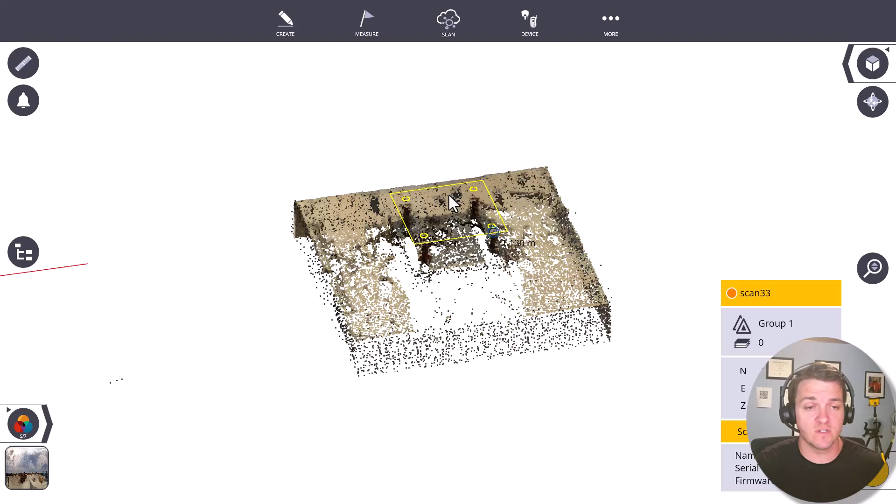It's kind of a two for one. It's going to be a brief overview of how to train models to automatically extract and classify point cloud regions that you're interested in, not just the ones we have on there, so you can own those models and figure out what you want. In this example, we're going to show you how to train a model and have it used to extract out anchor bolts.

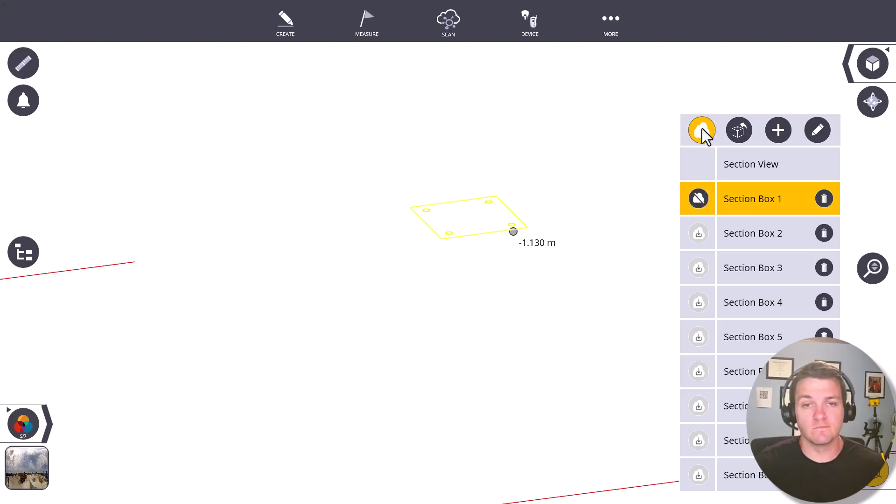We're also going to show you how to push that data to the Trimble Reality Cloud Platform Service, since it just came out. So what this looks like, in FieldLink, what you'd be using in the field, you could easily resection the scanner like what was done here and have that placed, even if you only have 2D models on top of where it should live.

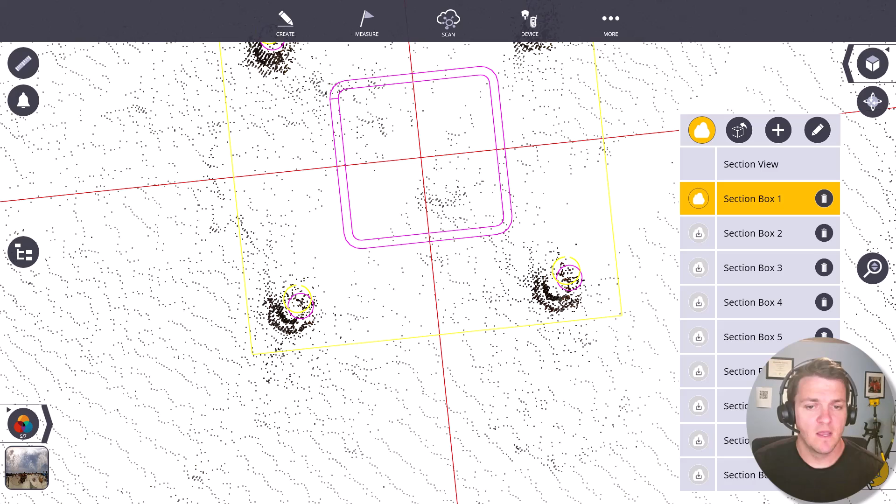So here we can start to see these anchor bolts are roughly in the right spot. I'll turn on the full density so we can see that, and we can confirm they are. I can start to create points on these anchor bolts, which currently, without the Reality Cloud Platform Service, can't be viewed on Connect. But if I can send that cloud, I'd rather do that. So here we can see those full points.

I can export this directly as an E57 non-structured LAS, or if I have a 3D model, actually run a scan-to-model inspection and export that to Connect. I would simply export it. Let's say I already did that. We're going to change this to AB and then drag and drop that into Connect and let it tile.

Now, if I wanted to do this automatically, I could do this in TBC and train my own model. I'm going to link to the training of custom deep learning models and advanced point cloud filtering webinar, so you can hear from the experts on how to do this and get more detail on what is happening.

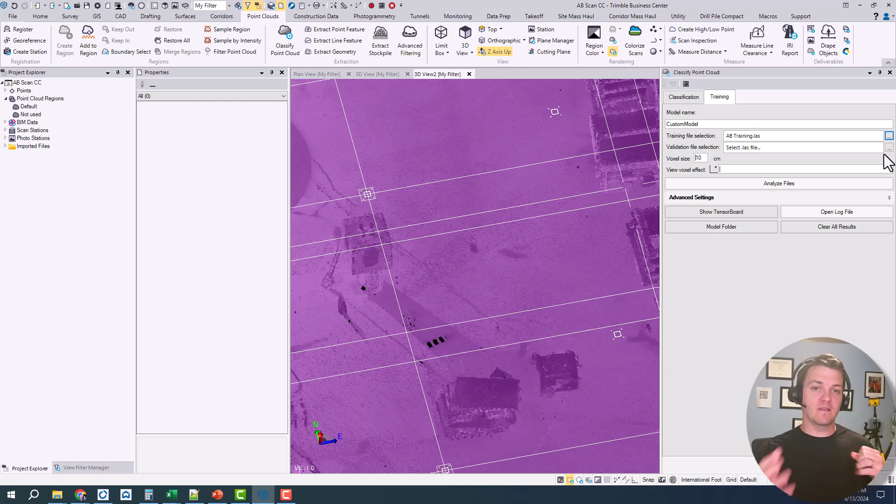To classify a point cloud region automatically, I would go to the training module. I've done this previously, but you need to manually do this the first time so you can give it a training file set and validation, essentially taking most of the region. It's important to have the entire point cloud, but within that have classified regions, so you have what you don't want to see and what you do want to see classified all within the same LAS. Same thing for the validation.

You'd want to do this on a couple different data sets and you can retrain it. Then you'd select your voxel size, which is essentially the size it's going to look at. For small anchor bolts, I'd do like 1, but they'll cover more of that in the webinar too and what those mean. Then you're going to run it through a training data set.

This will take quite a bit of time to actually train it because it's deep learning. It's going to try and figure out, based on the scan data and what you've submitted, how it can match that later for you. Once we've done that, it'll show you the score of what it's coming back through in that TensorBoard.

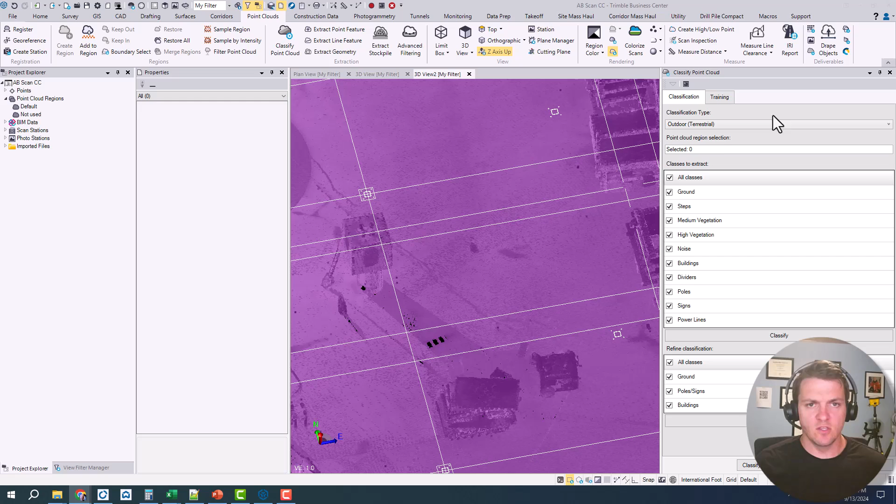We're not going to run that right now since it does take a little bit of time, but once it's done, we'll show you a bit of what that TensorBoard looks like. You can come in and select the custom model that you want to run. You probably want to name that a little better than I did.

And then classify the data that you want. So here I'm selecting the not used, and then I'll classify the anchor bolts. That's going to use that model to automatically extract out just the anchor bolts.

Within that webinar, they show you some customer examples. If you do a good job of segmenting and submitting enough data for it to compare to, they were seeing success rates of 98, 99%.

You're going to see the model I used to train it, and it's actually the same model I'm using here without really going through and doing too much. It didn't score as well, but it's still pretty successful. So we'll let that take its time to chug through, and then we'll show you what the results look like after it's done.

If we jump over to the new Connect Reality Cloud, you can see this is what I've done earlier. You can push it from Connect, or you can drag and drop those E57s and then tile it and view it. That data is going to come up because we've georeferenced it. Everything's essentially in the right spot, and I can start to turn those on. So here is that E57 data.

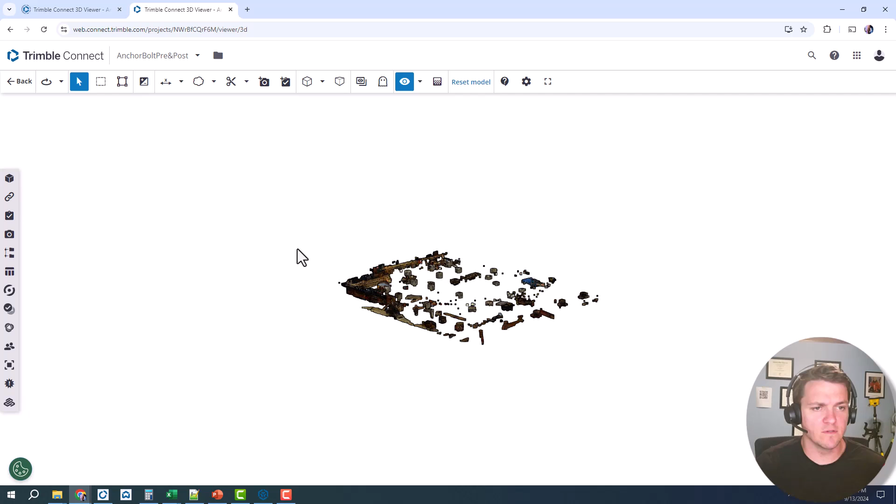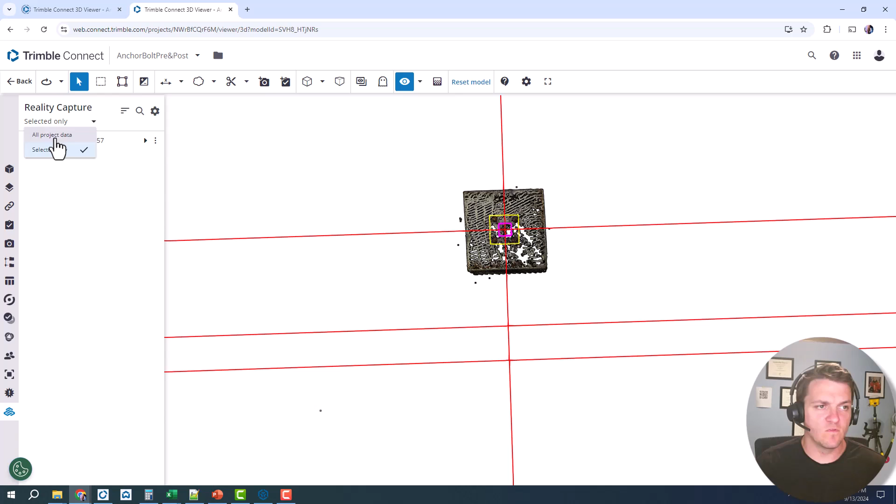What I like to do is also always keep that anchor bolt or the model data that's there. Here we can see the E57. I pushed from FieldLink, moved it over, dropped it in Connect, and you can see it there. The anchor bolts actually look a little bit like this. You can see I have quite a bit of noise because I didn't train a great model, but it does extract out pretty well what that looks like.

So as it's chugging through here, we'll come back and show you that result when it's done. But I'm able to quickly train that model to segment what I want. Quickly is a relative term. But once I do have that done, it's able to classify it and then send it over pretty quickly to Connect,

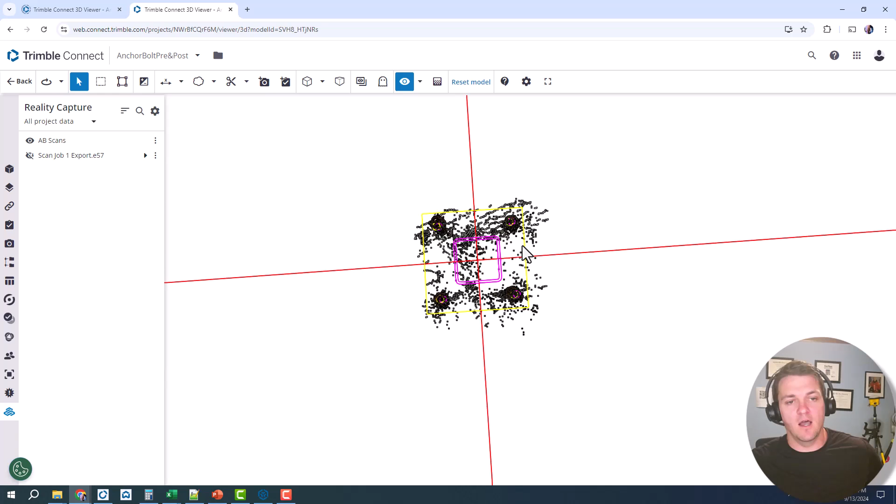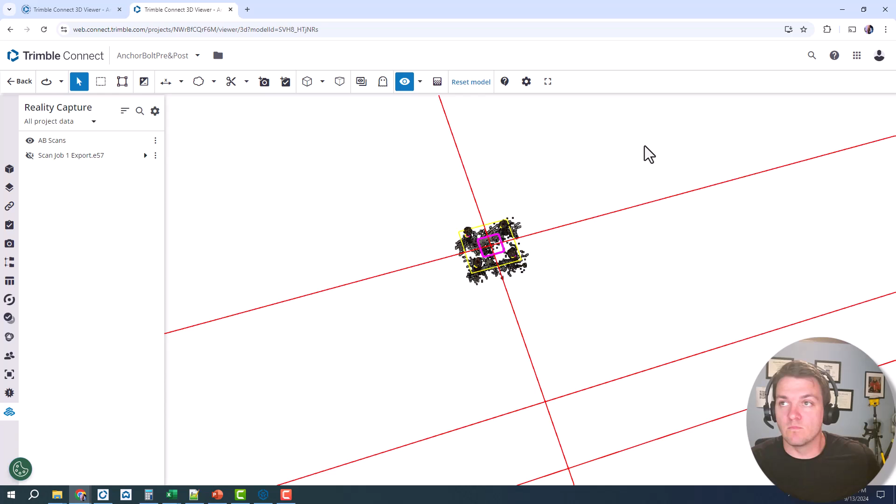And if you can quickly slice this out, users don't need to learn how to turn on and off different classification layers or use clip planes. So it is a pretty nice workflow. We'll jump over and see where we're at, about 42% of the way done.

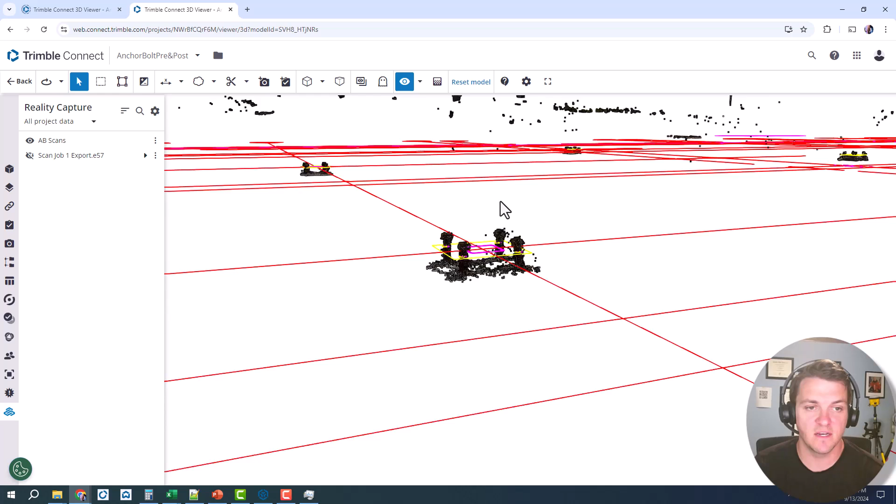And I think really valuable is just sending that data here to Connect so that you can share it with other stakeholders, and they don't even need a license. They can come in and actually see where that's at. So we'll wait for that deliverable to be done and then we'll end this one.

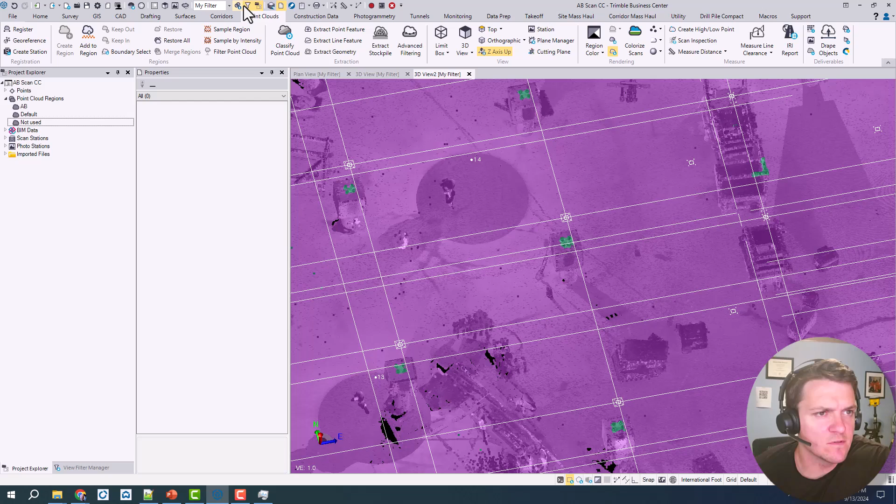If we come in here and I switch over, and sorry, I'm not the most advanced TBC user, we can see what was extracted, and I'm pretty happy actually with those results. But you can see it obviously still needs some cleanup, and some spray that could be better fixed with more training on a model with more data, and continuing to improve that.

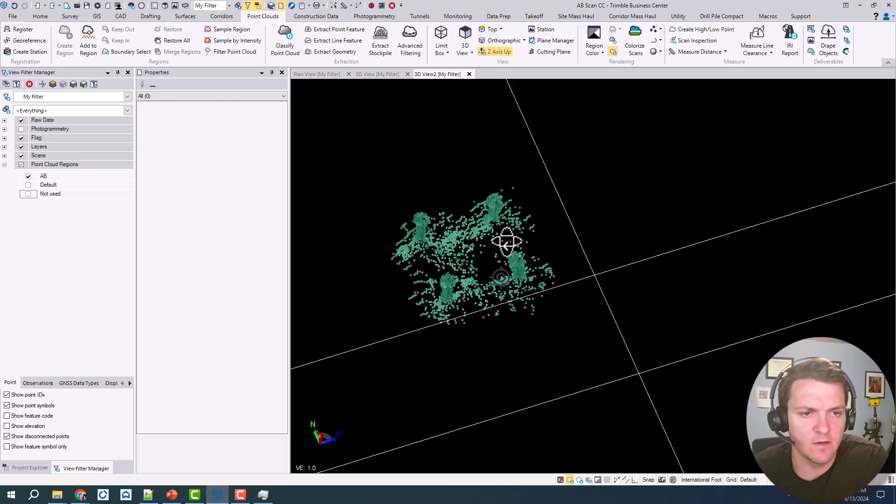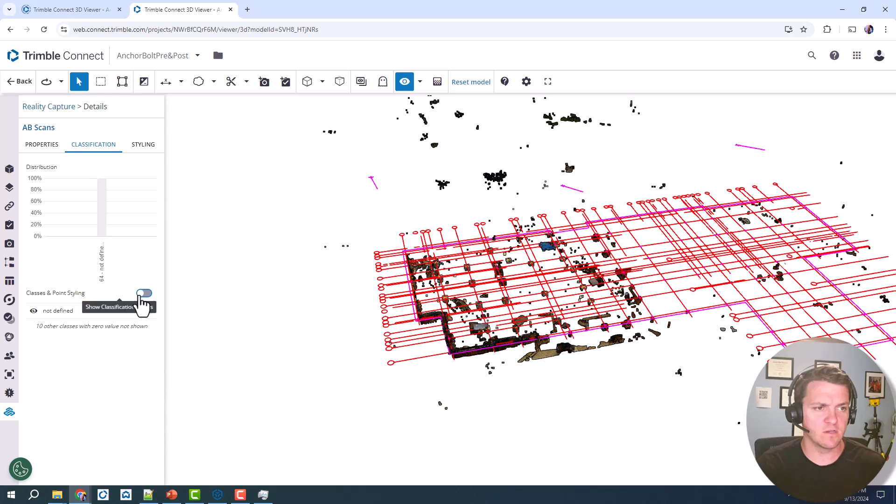So from here, I could push it up from TBC, or I could just create this as an LAS or E57 file, drag and drop that into Connect, and then see it here in the Reality Capture tab. So I can set everything there, or once I get it there, I can actually change the classification of what's in there too. So thanks, and we'll see you in another 2 weeks.